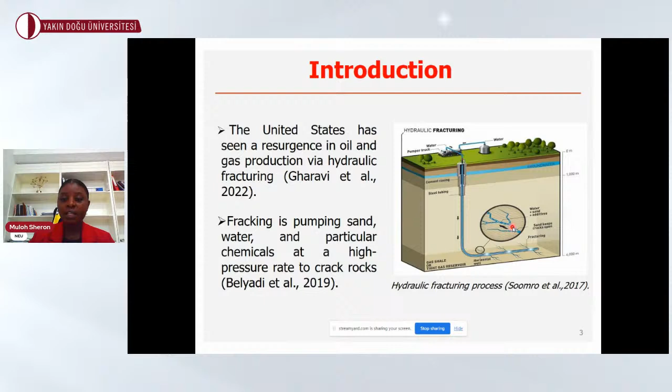So what do we really understand by hydraulic fracturing? It is a well stimulation technique that is used in unconventional and tight reservoirs in order to improve productivity by pumping sand, water, and other chemicals downhole into the reservoir at high pressure in order to break the rocks so that oil and or gas can easily flow from the reservoir into the wellbore.

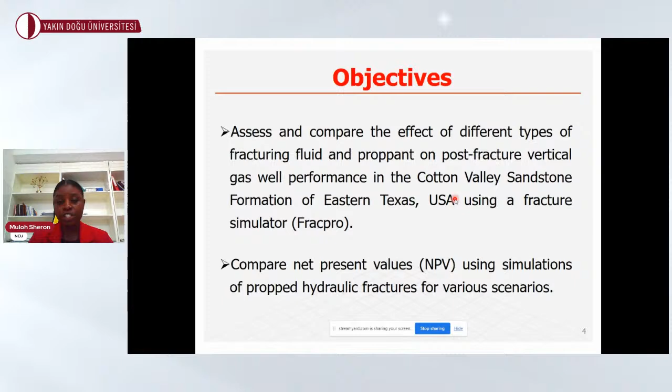The original work was done by Robinson and others in 1992, where they evaluated the hydraulic fracture performance in the Taylor Sandstone reservoir using a single layered model. In 2016, Shaoul and others utilized a multi-layered model to improve long-term gas production. In this study, the main goal is to assess and compare the effects of different fracturing fluids and proppant on post-fracture vertical gas well performance in the Taylor Sandstone reservoir using a fracture simulator known as FracPro, and to compare net present values using simulation of propped hydraulic fractures for various scenarios.

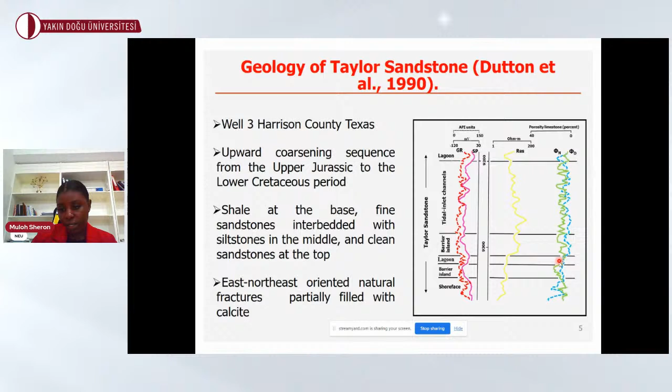The Taylor Sandstone reservoir is a thick upward coarsening sequence made up of sand, siltstone, and shale that were deposited on different depositional environments as shown on the figure. As we can see, the reservoir quality decreases drastically in the lagoon deposit.

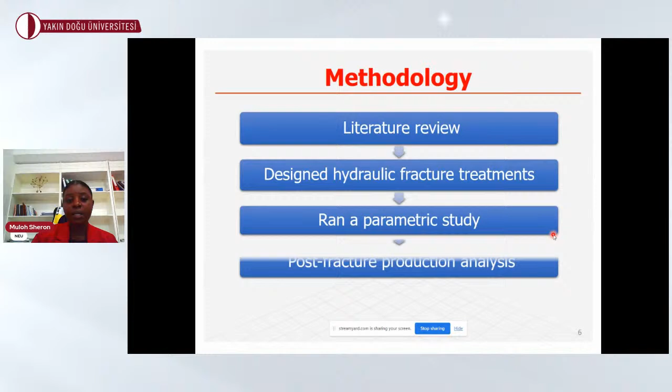The methodology was done as follows. Firstly, we carried out a detailed literature review for all petrophysical and reservoir properties, followed by designing hydraulic fracture treatments. Thereafter, we ran a parametric study and conducted a post-fracture production analysis. And lastly, an economic analysis was done. The table shows the reservoir properties that were used in modeling the hydraulic fracture.

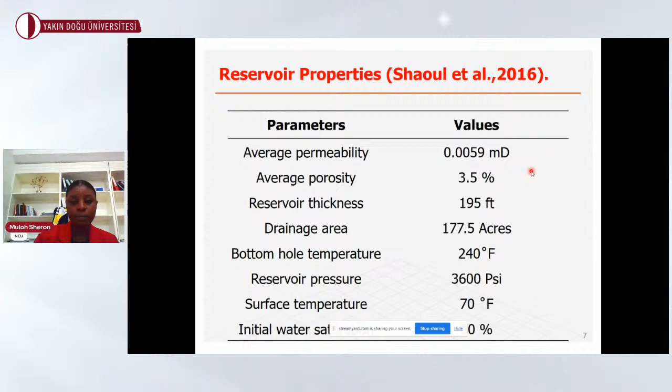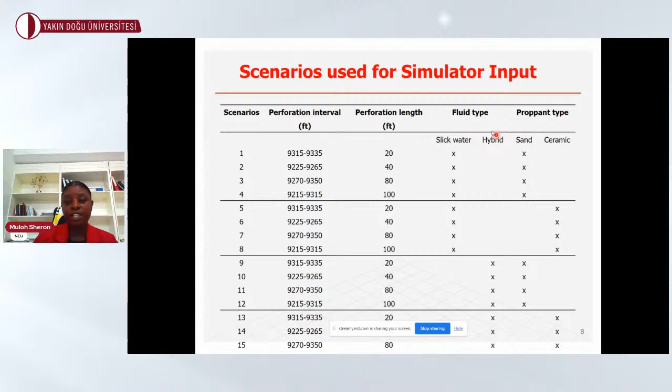16 different scenarios were used in this study. We have 4 different perforation intervals that were defined by their perforation lengths, 20, 40, 80, and 100, 2 types of fracturing fluid, slick water and hybrid, as well as 2 types of proppant, sand and ceramic proppant. A proppant is basically a solid material that is pumped downhole together with the fracturing fluid in order to keep the fractures open.

2 types of treatment designs were used in this study, slick water and hybrid fracturing. Hybrid fracturing is basically a combination of 2 different types of fracturing fluid. In this case, we use slick water and 20% linear gelled water. We use the same sizes and types of proppants for both designs in order to be able to compare their fracture geometries as well as productivities. Slick water was pumped at a rate of 80 barrels per minute, while hybrid was pumped at a rate of 50 barrels per minute.

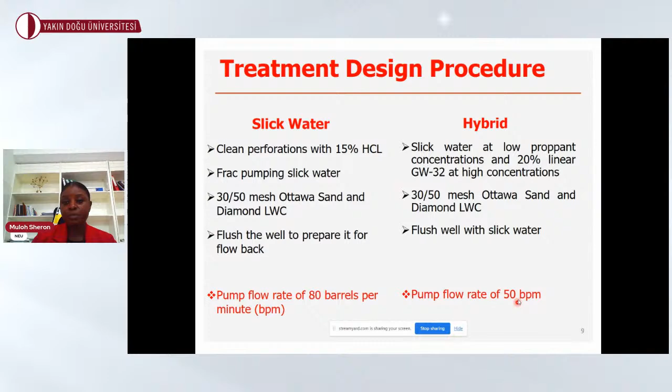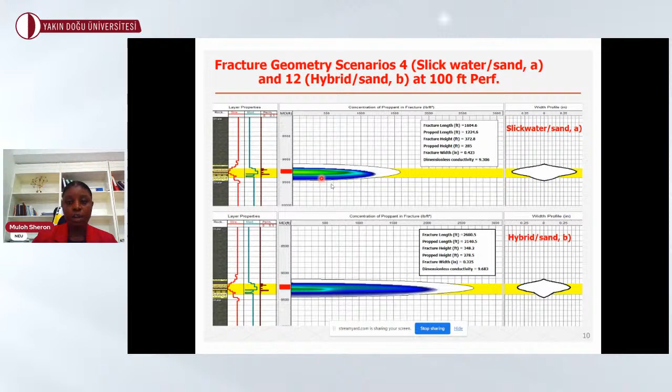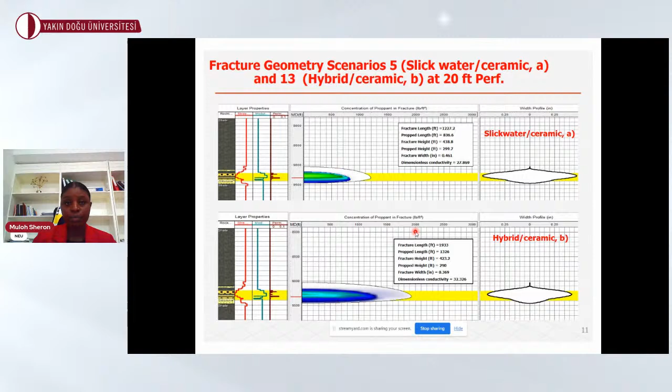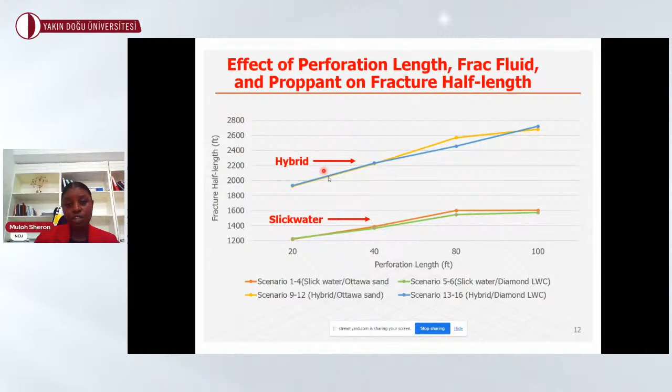This can be explained using Stokes' law. Hybrid fracturing consists of a linear gel that increases the viscosity of the fluid, which helps to increase the proppant carrying capacity, thereby depositing the proppant further into the formation. For slick water frac, all the scenarios that utilize sand proppant show slightly longer fracture half lengths compared to the scenarios that utilize ceramic. But the reverse was true for hybrid fracturing, except for scenario 11.

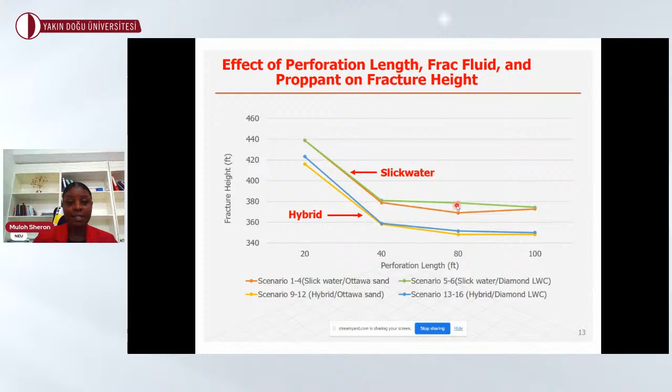Also, all the scenarios that utilize diamond lightweight ceramic proppant show taller fractures compared to the scenarios that utilize sand. But it was expected that sand shows slightly taller fractures compared to diamond lightweight ceramic because sand has a lower specific gravity.

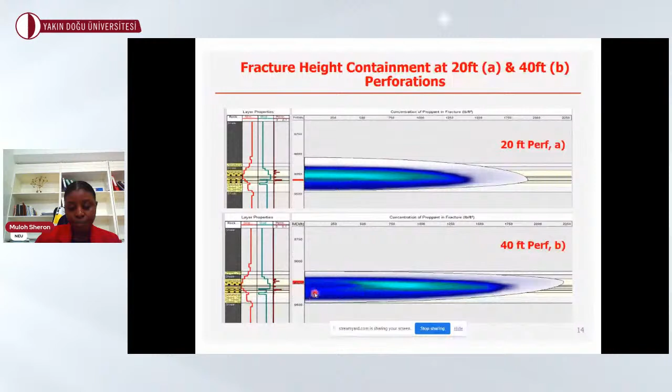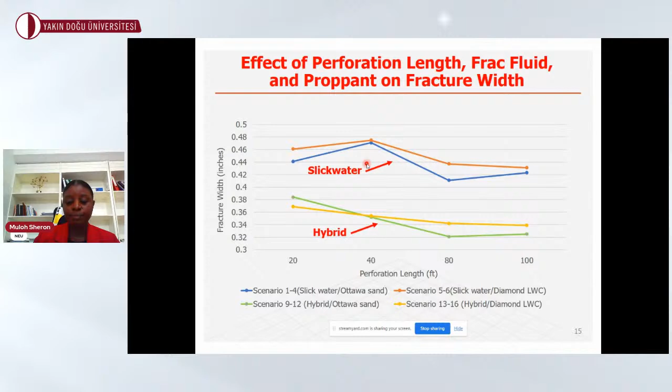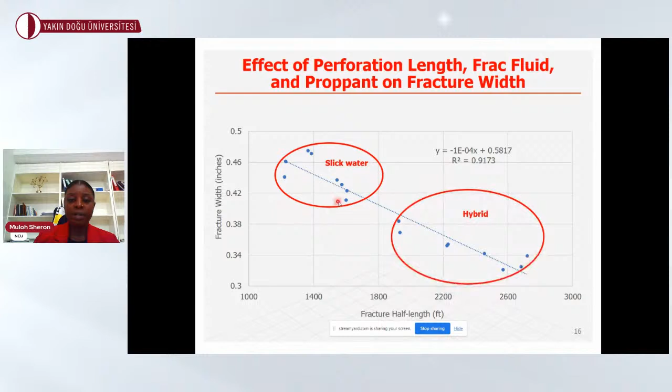In a study conducted by Perkins and others in 1961, they found that the hydraulic fracture half length can affect the fracture width. In this study, we see a very good correlation between the fracture width and the fracture half length. And from the graph, we notice that the fracture width decreases as the fracture half length increases. So we can say that slick water produces broader fractures because of their shorter fracture half lengths, while hybrid produces smaller fracture width because of their longer fracture half lengths.

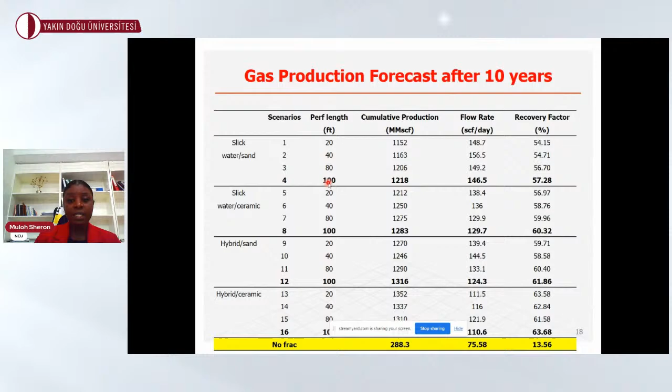The table shows gas production forecast after 10 years for all 16 scenarios versus a case of no hydraulic fracture. From the table, we notice that for the 4 different cases, the perforation length of 100 feet had the highest gas output. The graph shows cumulative production versus time for the 4 best scenarios used in this study compared to a case with no hydraulic fracture. As we can see, scenario 16 had the highest cumulative gas production of about 1.354 billion cubic feet.

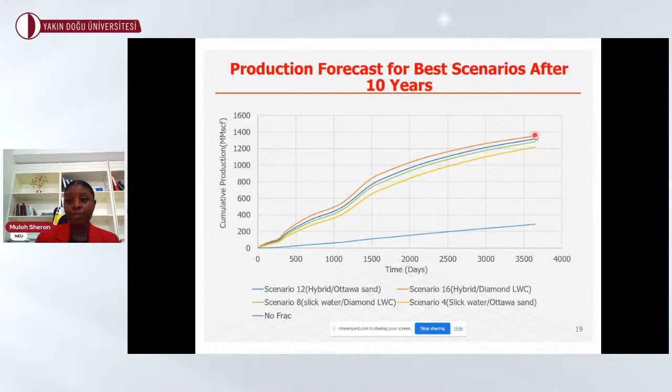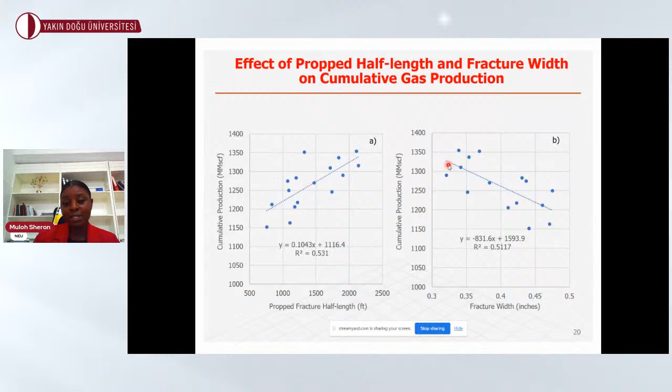We're going to discuss the effects of propped half length and fracture width on cumulative gas production. The first graph shows that cumulative production increases with an increase in propped fracture half length, while the second graph shows that cumulative production increases with a decrease in fracture width.

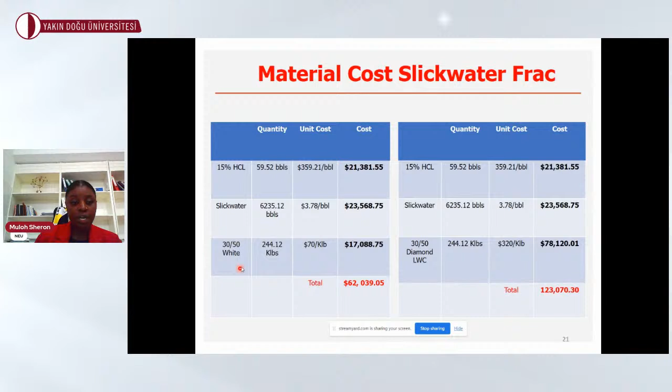In conclusion, hydraulic fracturing is an efficient technique to improve productivity in tight reservoirs. The fracture geometry depends on the rock mechanical properties, fracturing fluid, proppant types, and the perforation length, while production analysis depends on the fracture half length and the amount of proppant in the fracture.

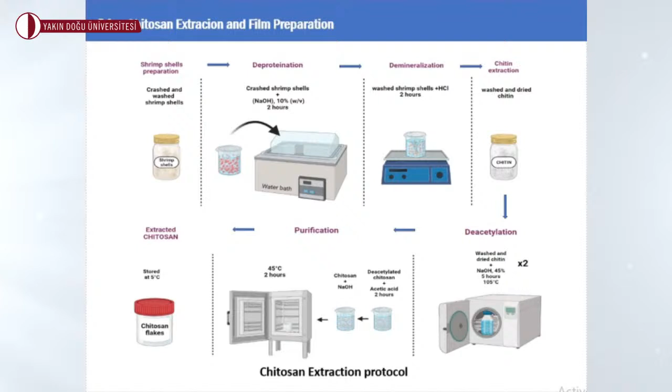The precipitate was washed and dried into chitosan powder or flakes. Finally, the obtained chitosan was stored at 5 degrees Celsius until use. Moving now to the chitosan film preparation. The chitosan film preparation involves dissolving chitosan powder in a 2% acetic acid solution, stirring for 6 hours, casting onto petri dishes, and then drying at room temperature.

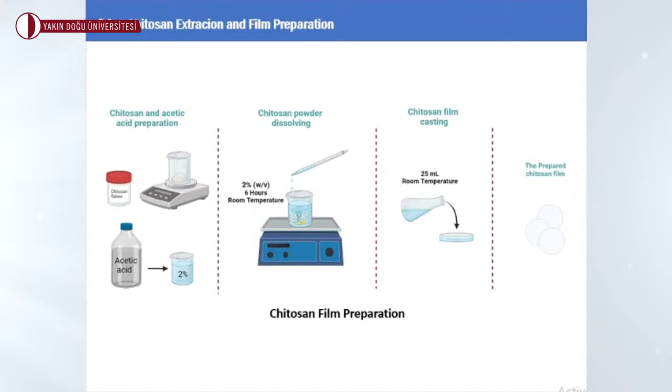Moving now to the chitosan characterization. In the following figure, we delve into the Fourier transform infrared spectroscopy absorption spectra of chitin and chitosan. Both spectra indicate the presence of hydrogen bonds, with chitosan revealing a less ordered structure. Shifts and variation in certain absorption features suggest changes in molecular vibrations, emphasizing structural differences. Notably, the absence of specific bands in the chitosan spectrum signals transformative shifts, indicating the impact of the deacetylation process on the polysaccharide's structure.

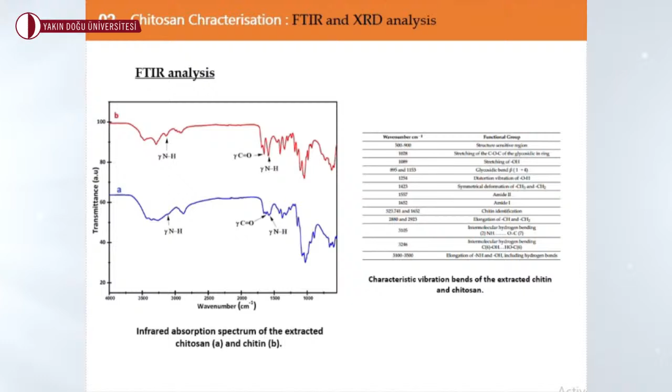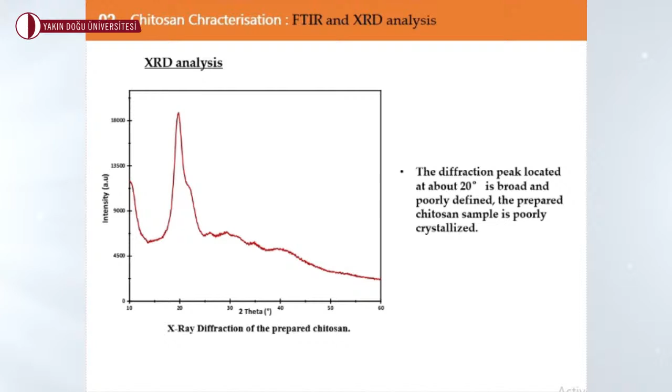For the X-ray diffraction of the prepared chitosan, the diffraction peak located at about 20 degrees is broad and poorly defined, which means that the prepared chitosan sample is poorly crystallized. Chitosan is mainly characterized by its molecular weight, which is an important parameter for a number of its physicochemical and biological properties, such as hydrophilicity, viscosity, water absorption, biodegradability, or biocompatibility.

Molecular weight was determined from the intrinsic viscosity by applying the Mark-Houwink equation. The molecular weight value found for this prepared chitosan is equal to 700 kilodalton, which is relatively higher than those generally given in the literature. And this is probably due to the mild treatment used for the deacetylation of chitin.

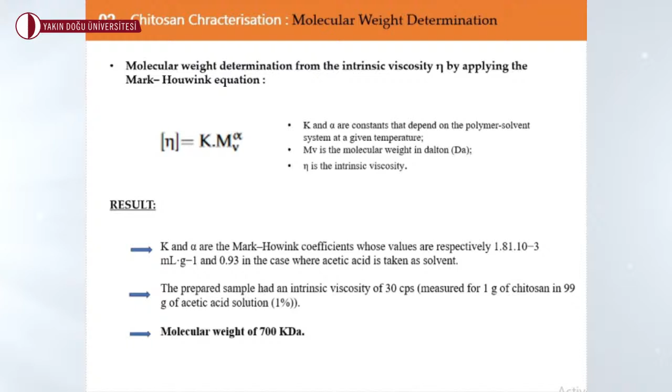Chitosan is partially deacetylated from chitin. The ratio of deacetylated units in relation to the total number of units is called the degree of deacetylation. The term chitosan applies to any copolymer with more than 50% deacetylation degree. And in order to accurately determine the degree of deacetylation of the extracted chitosan sample, 3 different methods were utilized. The first method is the conductimetric titration, then the pH titration second derivative method, and finally the infrared spectroscopy.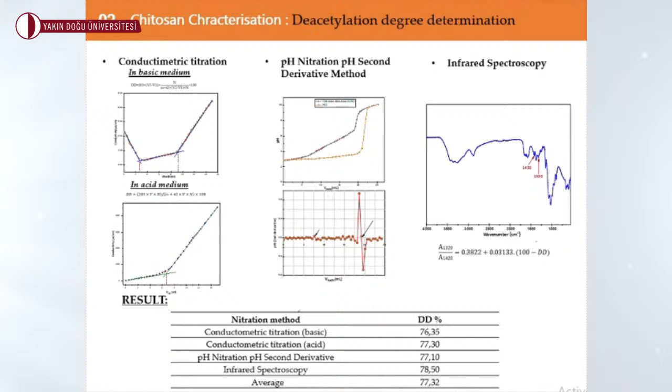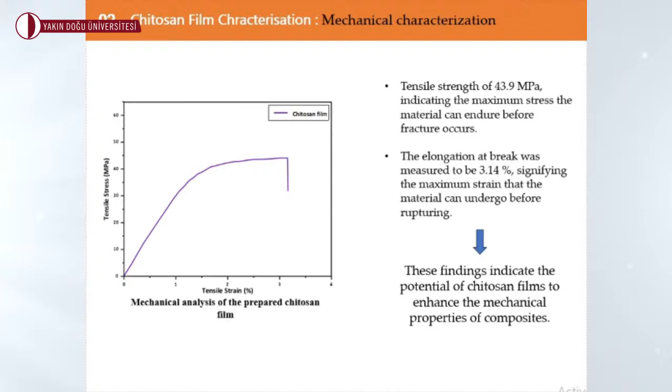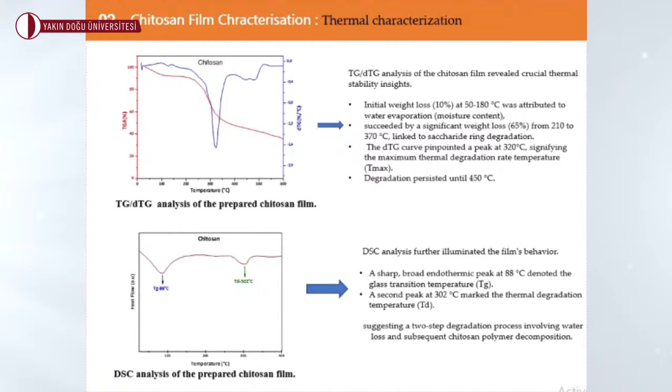To conclude, we can say that chitosan is a promising biopolymer for use as matrix material in composite applications. The extracted chitosan possesses several desirable properties. These properties make it suitable for use in various fields, including biomedicine, environmental science, or industry. By controlling the degree of deacetylation, the properties of chitosan-based composites can be enhanced, resulting in improved biodegradability, biocompatibility, or

even mechanical properties. And our study highlights the potential of chitosan as matrix for piezoelectric composite materials. By combining chitosan with piezoelectric materials such as piezoelectric ceramic powder, composite material with improved piezoelectric properties could be developed. And we can say finally that these composite materials have potential uses in areas such as energy harvesting, sensors, and actuators due to their unique properties.

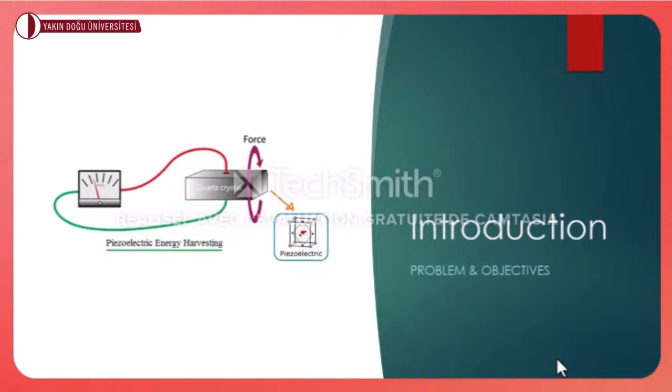The rectifier bridge is considered ideal and the resultant rectified voltage VDC is assumed to remain constant, which is a reasonable approximation when the time constant RL multiplied with CR is significantly greater than half the mechanical oscillation period. In determining the output power, we assume that the mechanical displacement U follows a sinusoidal wave and the open circuit voltage V on the piezoelectric material also exhibits a sinusoidal pattern.

In this method, the diode rectifier operates in a blocked mode, maintaining the piezoelectric element in an open circuit when the absolute value of V is below VCR across the capacitor. As soon as the value of V exceeds VCR, a current flows through the capacitor and then to the load. The generated power is the energy produced in a period T, calculated by integrating the product of the voltage and the current over one period.

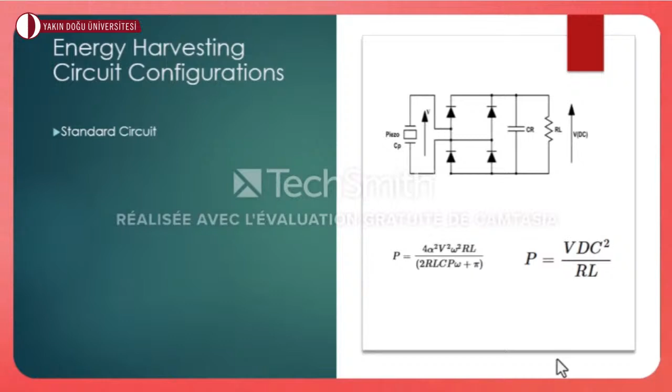The drawback of this circuit stems from the discontinuity of the current flowing to the load and the absence of synchronization with the piezoelectric voltage. As a result, traditional interface circuits are ineffective in this scenario. It's crucial to highlight that the mentioned circuit serves as a baseline and doesn't contribute to enhancing power output. Therefore, additional circuits and network topologies are proposed to augment power generation.

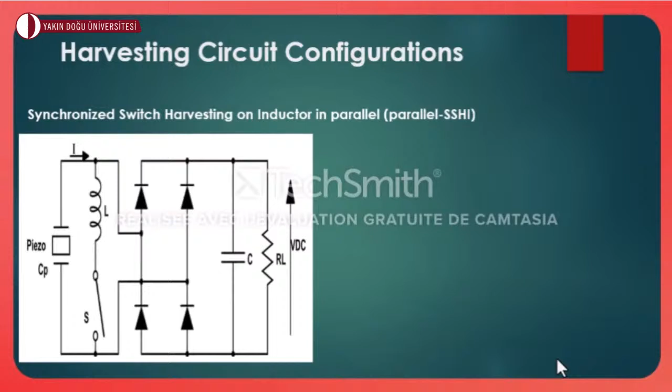Moving on to the parallel SSHI. The parallel SSHI interface introduces a nonlinear processing circuit connected in parallel with the piezoelectric element, as depicted in the figure. This circuit comprises an electronic switch with an inductor L connected in series. The switch is predominantly in the open state, except when an extremum in displacement occurs. At that moment, the switch briefly turns on, creating an oscillating electrical network involving the inductance L and the clamped capacitance Cp of the piezoelectric element.

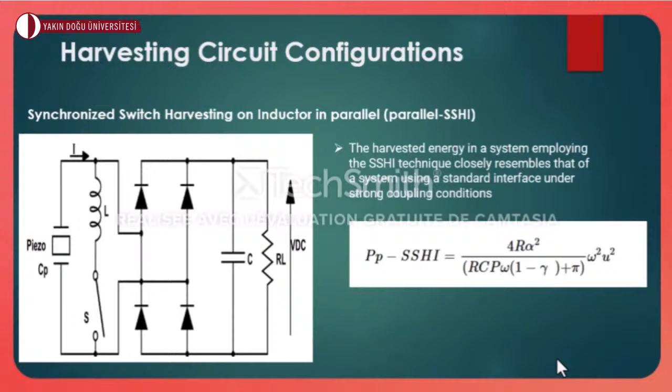As a result, the energy stored in the structural clamped capacitor Cp is released through LC resonance, reaching a minimum value. This action causes an increase in the piezoelectric voltage. The harvested energy in a system employing the SSHI technique closely mirrors that of a system using a standard interface under strong coupling conditions. Moving on to the series SSHI.

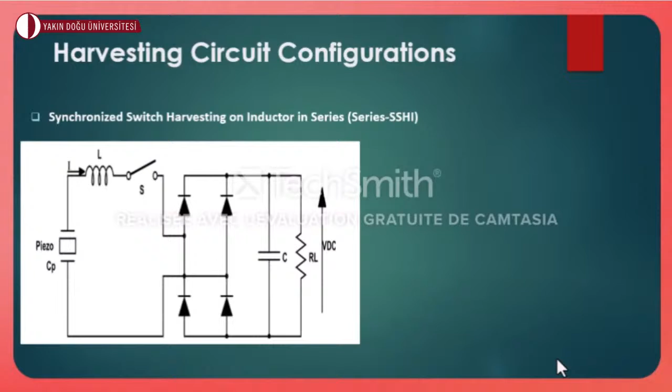In the series synchronized switch harvesting on inductor technique, the approach closely resembles the parallel SSHI method. However, in series SSHI, the voltage processing device is not connected in parallel with the piezoelectric element and the rectifier input. Instead, it is connected in series, as depicted in the figure. The control strategy for the electronic switch follows the strategy described in the parallel SSHI case, maintaining the piezoelectric element in an open circuit most of the time. When the switch closes, electric charge flowing through the inductor L transfers a portion of the energy stored in the piezoelectric clamped capacitor Cp to the storage device.

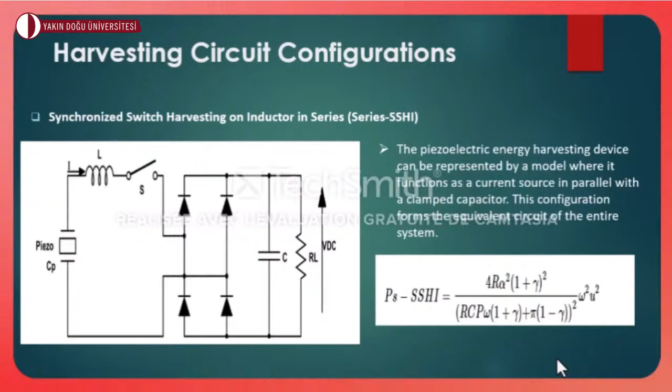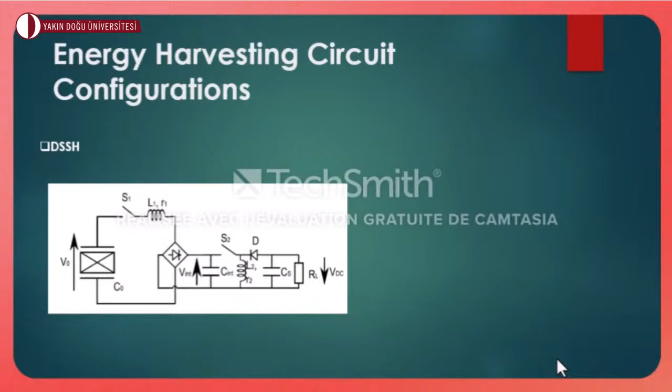Moving on to the DSSH. The double synchronized switch harvesting technique is designed to optimize energy harvesting by accommodating varying loads. It ensures a consistent harvested energy output despite load fluctuations and incorporates intermediate energy storage through a capacitor.

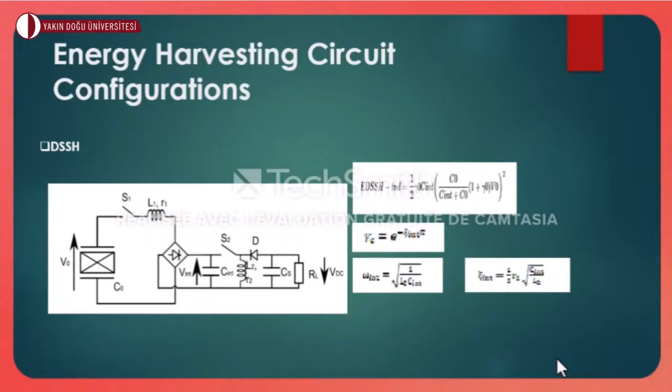This allows for effective control of the trade-off between energy harvesting and the damping effect of the extraction process, ultimately optimizing output power by decoupling extraction and storage units, with γC representing the overall efficiency of the converter, and ωint and ξint representing the natural angular frequency and the damping coefficient of the system. In summary, it's clear that the harvested energy is not dependent on the rectified voltage VDC, making it independent of the load resistance value RL.

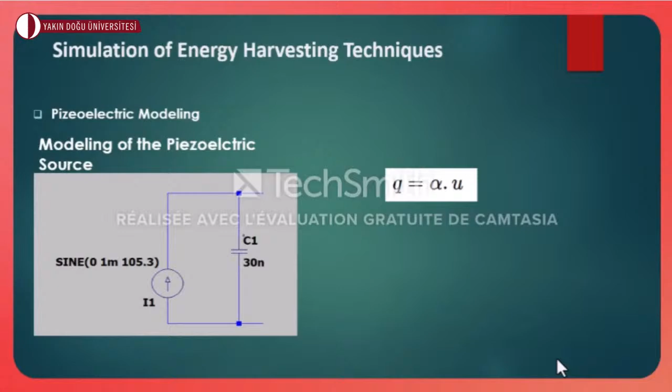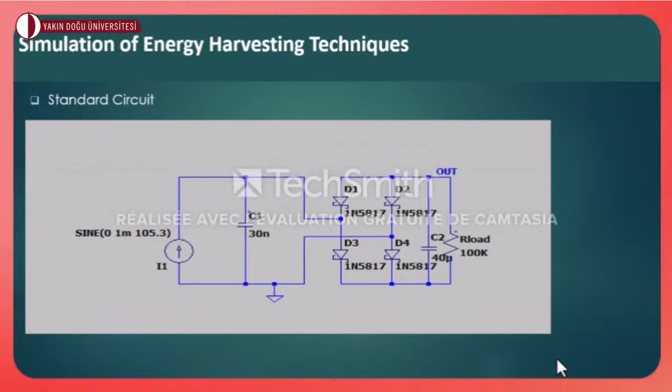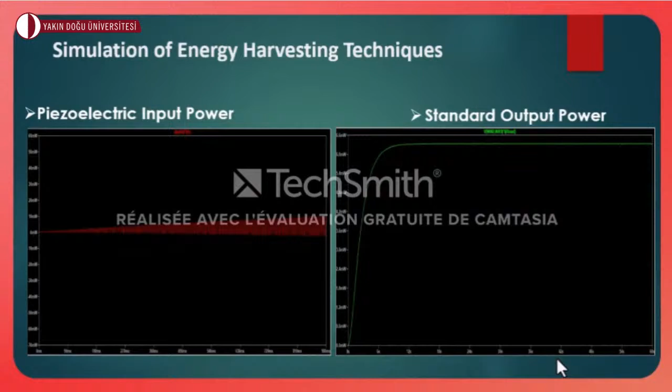As you can see, for the standard circuit, this figure shows us the composition of the standard circuit. Here, as you can see in both figures, the input piezoelectric power and the output power of the standard circuit. To assess the performance of the standard circuit, we compare the recovered power to the input power. In this case, we found Pout equal to 6.33 milliwatts, while the input power is 25.39 milliwatts. From this, we observe that the standard circuit doesn't effectively increase the recovered power.

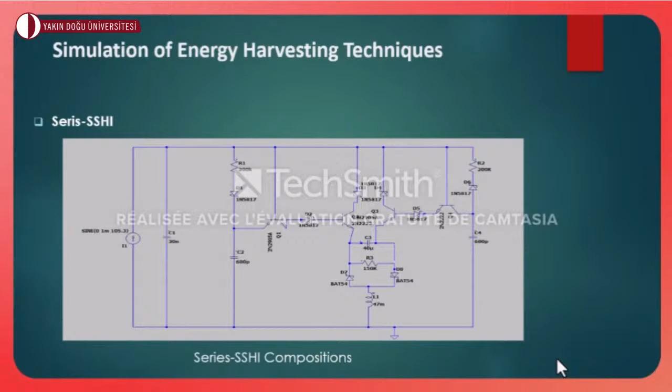Moving on to the series SSHI. As we can see in this figure, the composition of the series SSHI circuit in LT-SPICE. Here we observe the input piezoelectric power, and here we observe the output power. The gain of this circuit is approximately 730% compared to the standard circuit. Thus, it's evident that series SSHI enables significant energy recovery compared to the standard circuit.

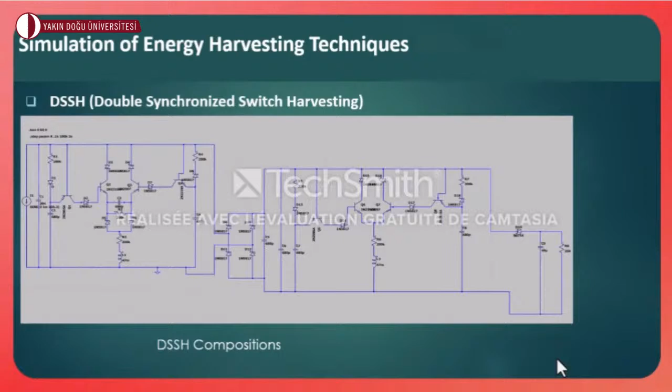Moving on to the DSSH, here we have the composition of the DSSH technique. The figure shows the input piezoelectric power, and here we observe the output power. We notice from the gain that the DSSH technique recovers 600% power compared to the standard circuit, independently of the load. In other words, for several load resistance values, the power recovered is independent of the load.

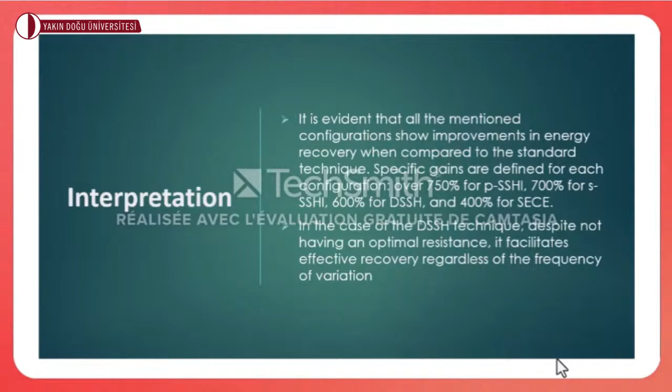It's evident that all the mentioned configurations show improvement in energy recovery when compared to the standard technique. Specific gains are defined for each configuration: over 750% for p-SSHI, 700% for s-SSHI, 600% for DSSH, and 400% for SECE. In the case of the DSSH technique, despite not having an optimal resistance, it facilitates effective recovery regardless of the frequency of variation. In summary, the conclusion underscores that energy recovery topologies involve aspects such as signal detection, switch operation, inductors, complex circuits, and optimal load.

Even load-independent systems like DSSH and ESSH have an optimal load region due to the oscillations and circuit losses. The conclusion highlights the delicate balance between feasibility and achieving a high power harvest, emphasizing the significance of discovering an energy recovery circuit with a simple topology and robust energy recovery capacity. The new work will focus on an in-depth exploration of the DSSH technique and analytical study of a buck-boost converter for piezoelectric energy harvesting.

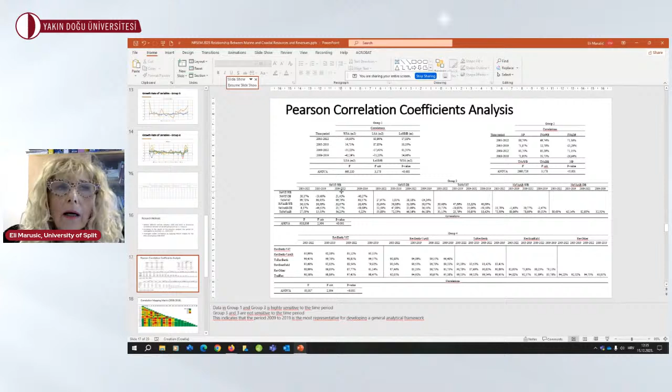And also group 3 and group 4 are not so sensitive. This indicates that the period of 2009 to 2019 is the most representative for developing the general analytical framework. This methodology can also be applied to different systems and different years.

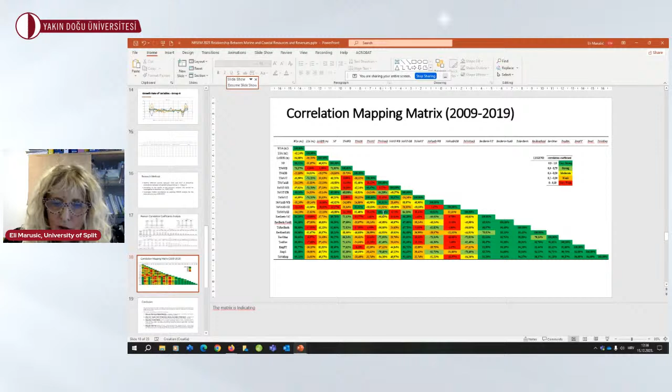Using just these variables brings us to the conclusion that we need to classify those periods into different time period groups to investigate the specifics of the interrelationships between not only the research variables but also the groups, because some variables can be grouped differently than we have done here.

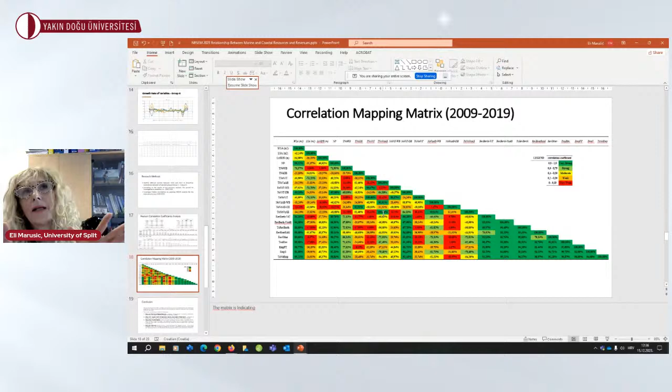To conclude the paper, this presentation investigates the visible and hidden correlations between the vital infrastructure of the nautical port system as an organization and the natural resources used, with the revenues generated by vessels in transit and vessels at the annual berth as the major generator of revenues, as previously mentioned.

Research analysis and results show that group 1 and group 2 are variables sensitive to parameter variations or changes in nautical demand, and group 3 and group 4 are less sensitive to parameter variations. Therefore, the research proposed variable analysis comparing data for different periods, different numbers of years per period, which we call time period groups.

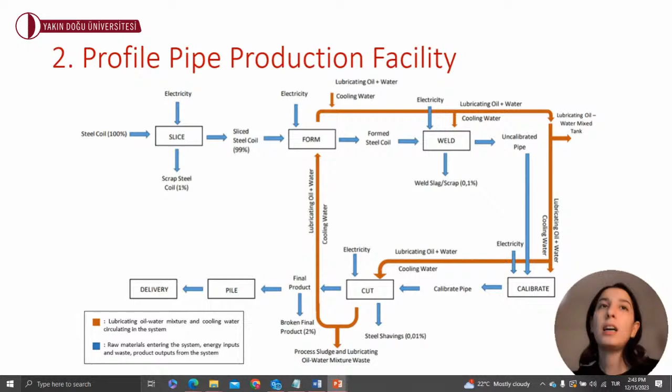The production process follows these steps: slicing, form, weld, calibrate, cut, pile, delivery. The blue arrow shows materials coming in, energy used, waste, and the final product going out. Orange arrows represent the circulation of oil-water mix and cooling water. In the initial slicing, large sheets are cut to the right size. In forming, the cut sheet becomes a rolled form. Welding shapes it into a pipe. Calibrating is for making rectangular or square profiles. In the cutting phase, the pipe is cut to the desired length. Lastly, cut products are stacked for shipment in the delivery stage.

Our next topic is material and method. The study aims to evaluate and compare the environmental impact of producing three different profile pipes. Each process in the production line was thoroughly examined and input-output inventories were determined. Gabi software was used with the EcoInvent database. The scope of this study includes the transportation of raw materials, production, and the removal of waste from the facility.

We have two different functional units: one is 1 ton of steel profile pipe production, and the other is 1 meter of steel profile pipe product.

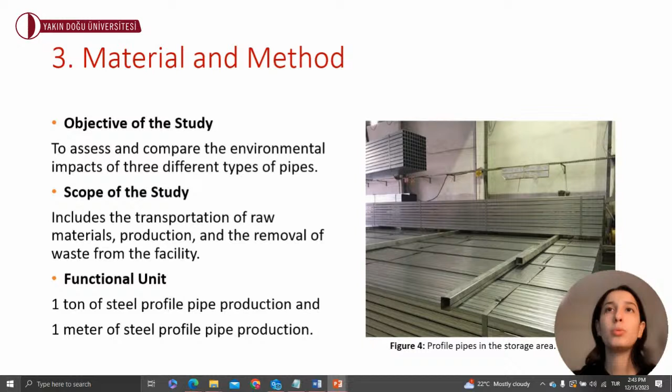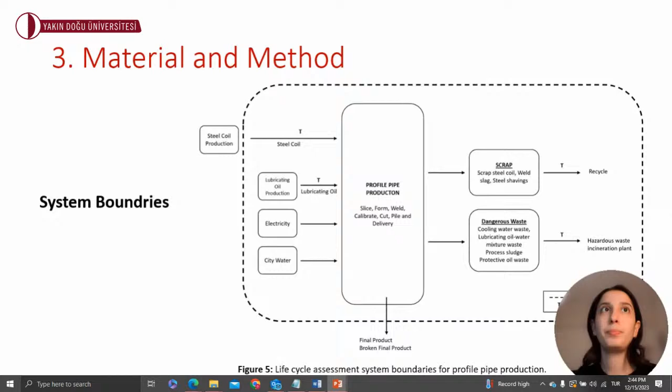For type 2, the pipe with a thickness doubled to 3 millimeters was selected, so we changed just one characteristic for each pipe. For type 3, a pipe was chosen with the same physical characteristics as type 1, but made from a different sheet metal. So there are two different types of sheet materials, black coil and galvanized sheet.

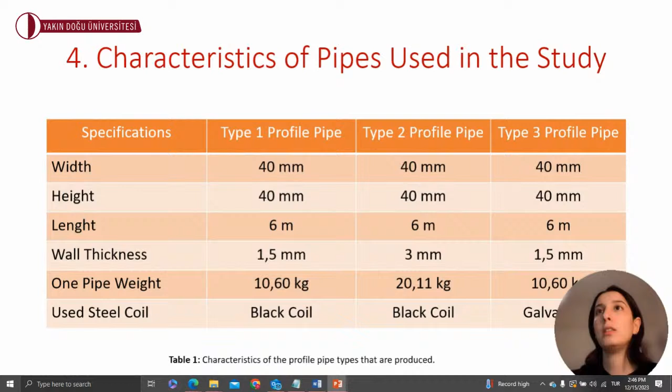In the environmental impact assessment, the production of coil sheet was not included in the system boundaries because the steel profile pipes can only be produced from the steel coil sheets, and it is not a situation we can change to reduce their impact. Additionally, coil sheet production has very high values in the impact categories, making it difficult to compare with the remaining factors. For these reasons, we focus on the factors that we can control to optimize our facility. So sheet production wasn't included in the project boundaries.

We conducted our study in a real facility engaged in profile pipe production. We carefully determined the inputs and outputs for the crucial step, inventory analysis. Inputs for profile pipe production can be categorized into 4 main headings: coil sheet, lubricating oil, city water, and electric energy. The outputs resulting from the pipe production include scrap, hazardous waste, and final product.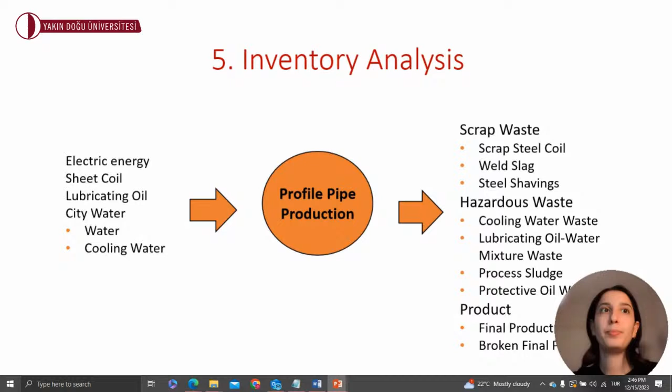Some reasons for the difference in the consumption values according to the inventory analysis are identified. One is that an increase in the thickness creates difficulty in processing the material, leading to more energy consumption. So when we compare the consumption results, we saw that the thickness creates difficulties to process, so it increases the energy consumption. Additionally, the rise in the thickness increases the temperature during the profile pipe production. To reduce the increased temperature, more cooling water and mixture of lubricating oil are used, so the water consumption increases too.

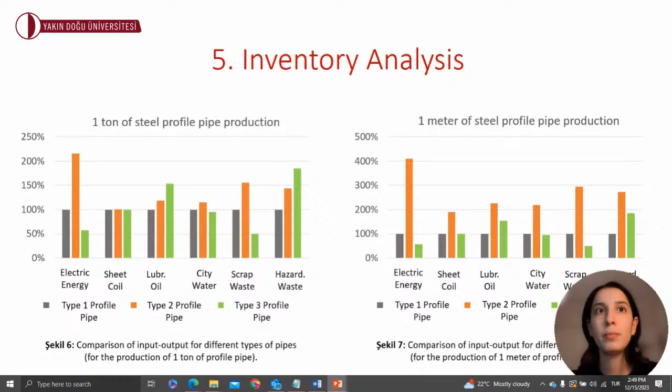So we can see that type 2 has the most significant impact on the environment, and type 1 and type 3 follow respectively, but in some categories type 1 follows behind type 2, and in some categories type 3 follows behind type 2. So it depends on the impact categories.

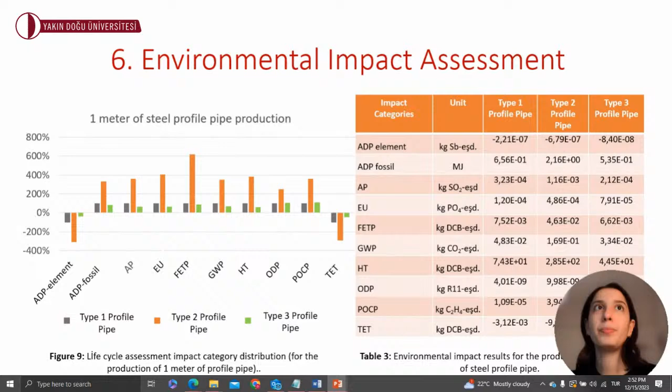In the literature, 2 sources were considered for comparison. So the results are similar. There are some differences, but we get similar results from the analysis. So we can say our study is aligned with the literature.

And in one source, a life cycle assessment study was conducted for coated steel pipe production. The other one is for uncoated steel pipe production. So there are different values from the studies, but one is coated, the other one is uncoated. So the value is between them most of the time.

Based on our modeling, the primary components influencing the environmental impact across various categories have been recognized as electricity consumption for 3 profile types considering 2 functional units. So we can say for 3 profile types for 2 functional units in most of the categories, energy consumption is the most significant environmental impact.

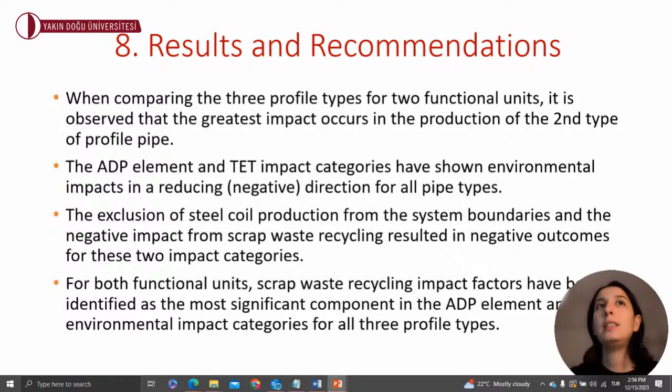The exclusion of steel coil production from the system boundaries and the negative impact from the waste recycling result in the negative outcomes for these two impact categories, as I said before. For both functional units, the scrap waste recycling impact factors have been identified as the most significant component in the ADP element and the TET environmental impact categories for all three types.

Except for the ODP environmental impact category, electricity consumption impacts have been determined as the most important component in the other remaining impact categories for, again, three profile types and two functional units. Using wind energy has the least environmental impact compared to grid electricity and solar energy. Choosing wind energy over grid electricity would reduce our environmental impact, so renewable energy is really important for us.